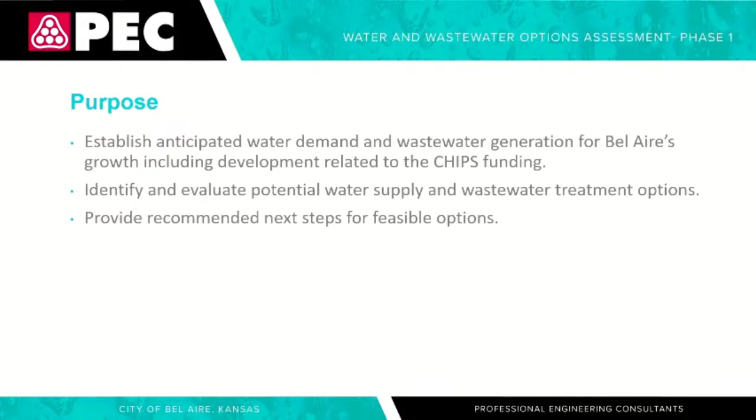So the scope specifically for the options assessment, again we had 4 phases total. This first phase was to take a look at the current contracts you have in place for both water and wastewater service, with CCUA and with Wichita, looking at the terms and conditions for that. We also wanted to look at the feasibility of water supply and wastewater treatment options, also for future connections. Obviously building new treatment plants for everything is an option, but we wanted to see what about future connections to your existing systems. So we looked at that as well.

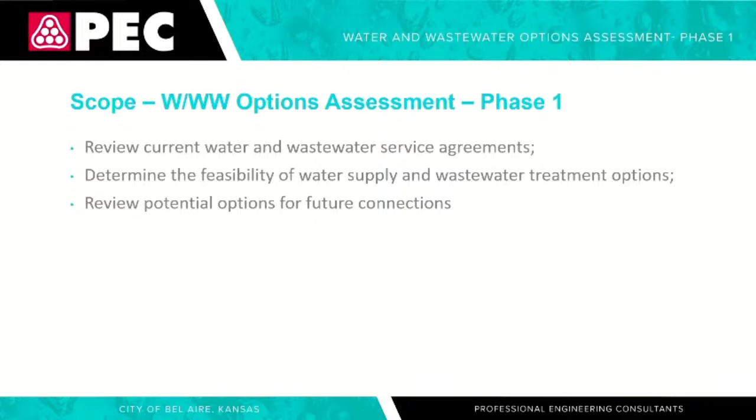Then to provide a reminder of what the water and sewer master plans are all about, since we are marrying up the two of these in this presentation and a lot of the work overlaps: the master plan intent is to really look at what's necessary within the systems themselves. So while the study Nicole's been working on is looking at the water supply side and specifically the treatment side, the master plan is looking inside those water and sewer systems themselves as to what improvements are needed.

The first step in any master planning process is to identify the growth areas and develop water and sewer projections based on, in this case, a 20-year planning period. So looking at what development you anticipate within the community for both water and sewer demands. In this case, we specifically were excluding the Integra suppliers as far as the master plan itself was concerned.

Then what we do is develop actual computerized models for each of those systems. So we modeled the existing water system and the existing sewer system, and then we go through and evaluate those models under current conditions, to identify any current issues or deficiencies in the system that would need to be addressed to fully take care of existing demands. Then we look at those over future periods, typically in 5 or 10 year increments, to see what is necessary to address those future demands as well.

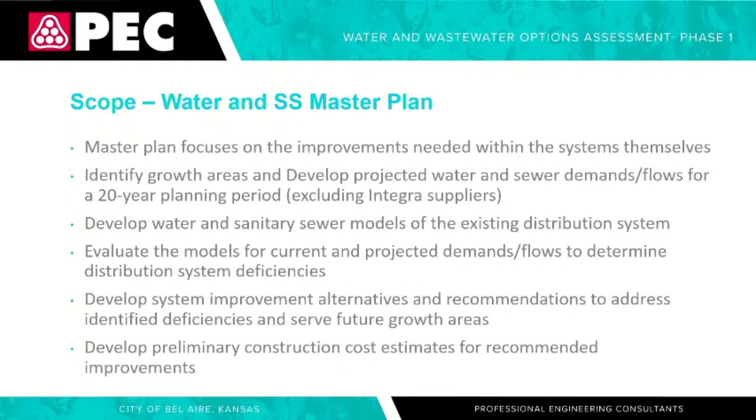And then basically develop construction estimates to go with each of those demands, or each of those projects, that are recommended.

Okay, so this first table summarizes the water demand projections, and there's a lot going on. There are a lot of numbers, there are ranges. So I'm going to go through and explain what all the information is on this table.

So the first thing I want to talk about are the different scenarios there on the left. Scenario 1 is basically what you guys are anticipating for internal development just within Bel Aire in the next couple of years—things that are already on the books for development that's going to occur, and we know those demands are going to be in the system in the next couple of years. So that's Bel Aire only.

Scenario 2 is the development that Bel Aire is anticipating in that next 5-year time frame, that 26 to 31 time frame, plus phase 1 of Integra. And then scenario 3 is, again, the development Bel Aire is anticipating in that 5-year time frame, plus the longer 32 to 43 time frame, plus Integra phase 2. So that's what the scenarios are themselves.

Then we get into the actual demand numbers. So what I want to explain first is the range. Scenario 1 is just Bel Aire—those are the numbers we've come up with in the master plan projections for just what we think Bel Aire is going to need in the next 2 years.

When we get down into scenarios 2 and 3, you'll notice those ranges—the low end and the high end. The high end of the range includes the 5 suppliers. The low end of the range is Bel Aire's demand plus phase 1 of Integra itself. Then if we add the 5 potential suppliers, that gets us to the high end of those ranges.

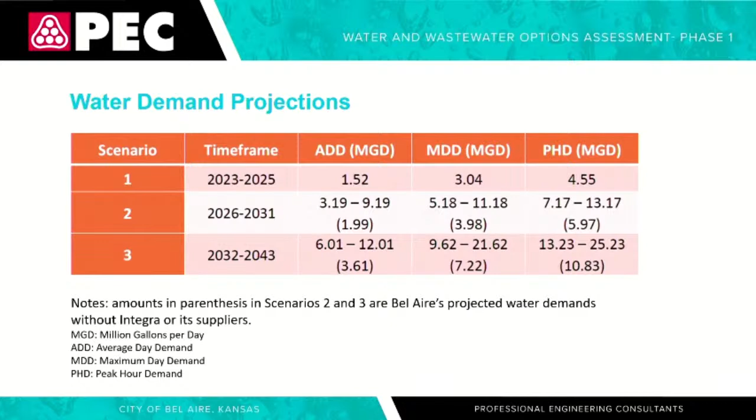So we are talking about quite a bit of water that is going to be needed when we look at these different scenarios for Bel Aire's expansion, but then also Integra and then these potential suppliers.

Okay, so then we're going to look at the wastewater side. All the same information applies here. Basically we're looking at, roughly right now in the next few years for Bel Aire itself, around 1.18 million gallons per day of wastewater flow for just Bel Aire and development. Then if we look at the highest, we're looking at almost 11 if we were to account for Bel Aire, Integra, and all those suppliers in that far out phase.

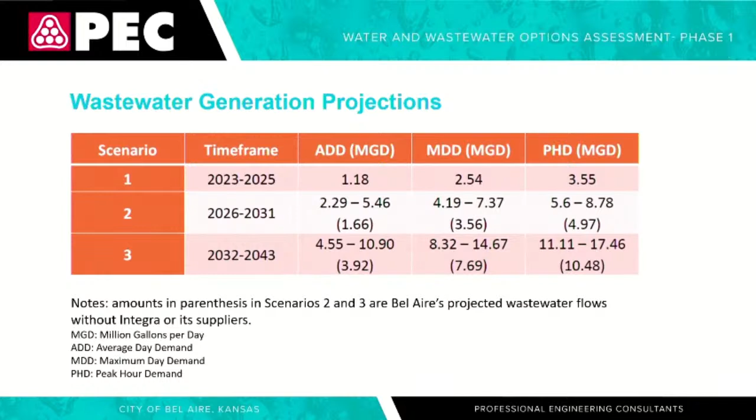So the next thing I want to talk about is just a quick summary of your existing agreements. So the first is the water supply agreements. I'm sure you guys probably know most of this already, but we'll go through it really quickly.

So the existing agreement with CCUA was established in 2002. There's a little over $6 million remaining on the debt obligations on the water treatment plant. You're entitled to 50% of the water treatment plant capacity, which in this case is 1.75 million gallons per day. There is currently no expiration date set in that agreement. And of course, when that agreement was made, the water rights that Bel Aire and Park City had transferred to CCUA. So the city doesn't have any current water rights associated with that.

The agreement that you have with Wichita was established in 2007, and it technically has a 20-year term. So 2027 is the end of that agreement currently. And right now, in that existing schedule, the city was set to receive just a little over 1 million gallons per day in 2028 per the original schedule that was included with that contract.

So basically what we can see from this with the existing agreements is that you could supply scenario 2. A reminder that scenario 2 is Bel Aire's development plus Integra phase 1. No suppliers, but you could do that with the current contracts in place.

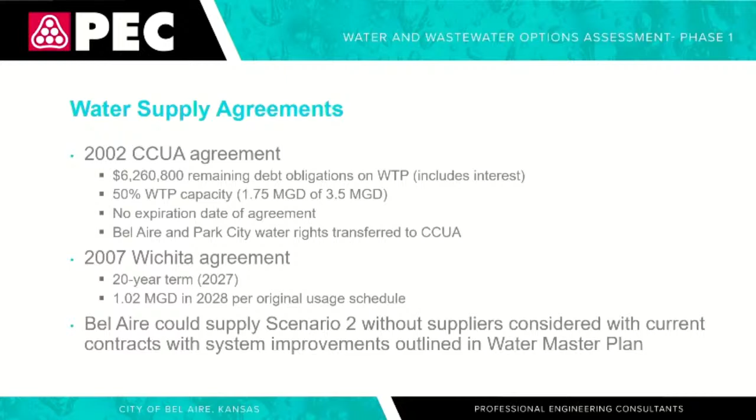All right, so then on the wastewater side, same thing. We've got an agreement with CCUA, same year, a little over $8 million remaining on that debt obligation. Through that contract, you guys have a little bit less than half of the capacity, so 1.01 million gallons per day of that existing capacity. Again, no expiration date on the agreement. And then obviously there's a consent order issue and response that's going on. So that's another issue with the CCUA wastewater plant.

In 2018, the Wichita agreement came online. There's no expiration date on this agreement, and there's no contractual flow limitations necessarily. This is an overflow connection that you have that is not used on a regular basis, but it is a connection that exists with the Wichita system right now. So we estimate, based on the data we had available, a little over 0.42 million gallons per day or so is the average flow sent through that connection, and about 1.25 of peak flow capacity for Bel Aire.

So the summary of the existing service agreements is basically you could just cover scenario 1 with your current contracts, which is just your development in the next couple of years.

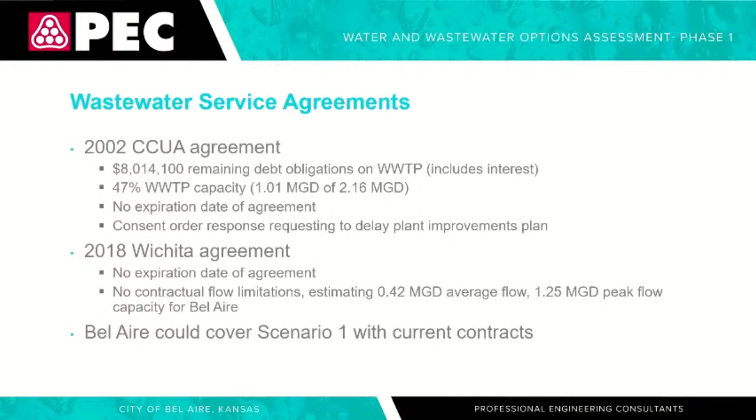Okay, so now we're going to get into the options that we looked at for both water and wastewater. So first we're going to talk about water supply options. One option obviously is the Wichita distribution system. You have connections there already, and there's the potential to supply additional water. A couple things we need to consider, though, are water rights restrictions and a saltwater plume. Obviously, that's always out there.

And when we talk about water right restrictions, that's basically referring to drought conditions. Obviously, if Wichita is not able to get all the water that they need out of their sources, then the wholesale customers will get their water reduced off of that. So that's just when we talk about water right restrictions, it's referring to the drought situations.

So the existing north pressure zone, City of Wichita, which is basically your connection out at 53rd and Rock, between Rock and Webb, could supply a maximum of about 3.2 million gallons per day. We've had conversations with the City of Wichita for them to run their water model to confirm approximately what we think we could get out of each of these situations. So about 3.2 million gallons per day.

And then the existing connection at 37th, like the Woodlawn Railroad area, could supply a maximum of about 2 to 3.5 million gallons per day. Now, of course, Wichita is building a new water treatment facility, and so we looked into that as an option as well. Obviously, the same issues with potential drought conditions would affect that connection as well. But that would require a pump station at the Northwest Water Treatment Facility and a new supply line.

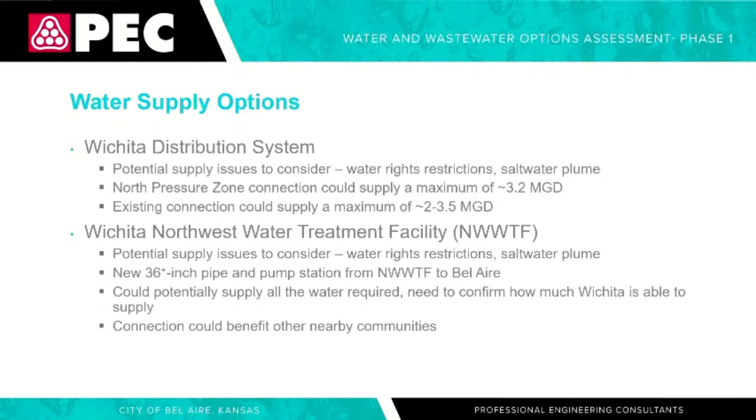We also looked at El Dorado as another option. We talked to them. This option would require, again, a pump station and a pipeline from the El Dorado water treatment plant to Bel Aire. Their facility could supply approximately 3 million gallons per day without any upgrades to their system, but they could get up to 6 million gallons a day as the maximum, though that would require upgrades to their plant. In initial conversations with El Dorado, they said they would pay for the water treatment plant upgrades, but Bel Aire would be responsible to cover the pump station and pipeline costs, and obviously any ongoing maintenance that goes along with those.

We also looked at the CCUA water treatment plant, since you have that as a supply currently. So you can use, as we talked before, 1.7 million gallons per day of the current capacity of that plant.

Two things to consider with that: one, CCUA only has 3.1 million gallons of water rights right now. I know they're in talks to look at recovering some from industrial conversion and some other things that are being worked through now, so there's potential that there are more water rights there. But at the current time, they only have the 3.1 million gallons per day that we can account for, and brand new water rights would be a significant investment for them to look into. So this conversion could potentially give additional supply there.

Just curious, how do you say we have a 3.5 million gallon per day current capacity when the water rights are only 3.1?

The last one on here is beneficial reuse. Anything that of the demands for Integra or their suppliers that could be met with reuse water, meaning treated wastewater that comes off of the wastewater plant, reduces the potable water requirement. So as we move forward and after Integra determines if they're 100% in, we can talk about that in more depth. But that's definitely something we'd want to look at to reduce overall potable water needs, if there's things that can be done with reuse water.

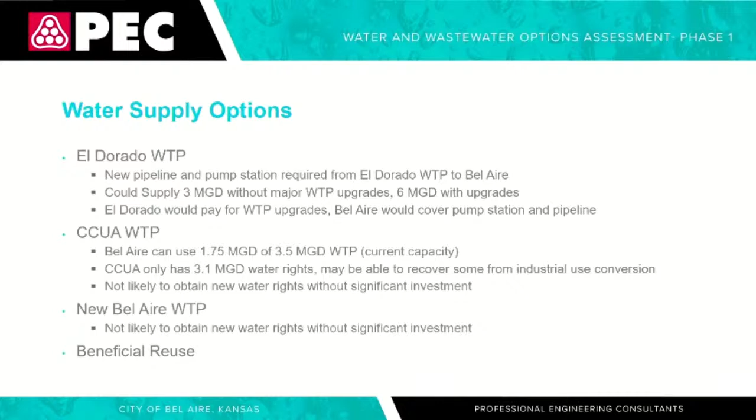So for wastewater treatment options, we looked at a Wichita sewer connection. We looked at the potential for a new connection, which would be at approximately 45th and Rock. That new connection can accept about 1.92 MGD as a peak flow from the city of Bel Aire.

And then we looked at the existing connection, which could accept a peak flow at roughly 37th and Oliver. That existing connection could take about 1.25 million gallons per day. We would need to verify all these flows, especially the one with the existing connection, since we've got data that we're working off of. We'd want to verify all of that to make sure, but based on the data we have, these are the numbers we could work with.

At the CCUA wastewater treatment plant, you've got the consent order issues going on that need to be resolved. But based strictly on capacity, you can use 1.01 MGD of the existing capacity. That plant could be expanded, but based on an estimate from Burns & McDonnell's evaluation, it could only be expanded to about 4.5 million gallons per day because of site restrictions. There's only so much space available to put additional treatment capacity and basins in there, so we estimate about 4.5 million gallons that it could be expanded to. So really, you're going from 2.16 to 4.5. Not a lot of capacity, but you could almost double it.

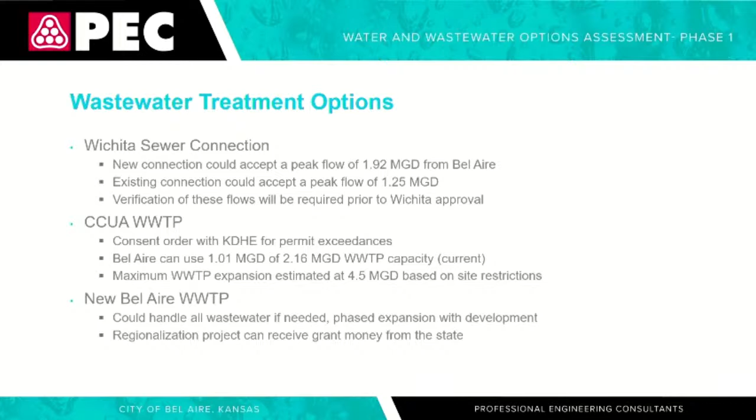Okay, so now we're going to talk about preliminary improvements that have come out of the master plan. As a reminder, this is with Bel Aire and Integra only, no suppliers.

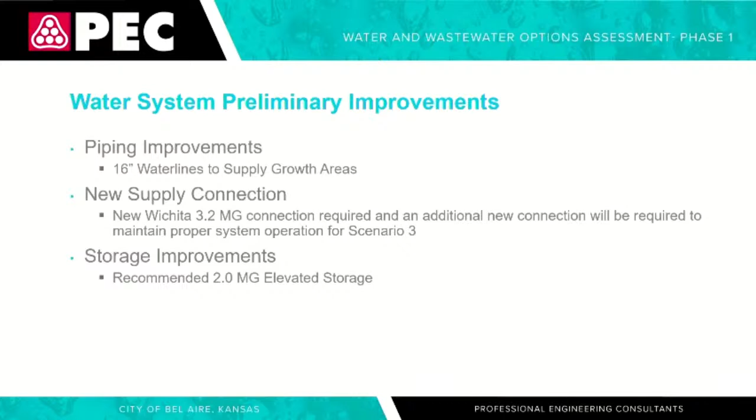And then the other thing we'd look at here is storage improvements, at 2 million gallons. I know it seems kind of strange to put a proposed tank basically right next to the City of Wichita's tank. However, that tank would be required for the City of Wichita - they would have to operate that tank to serve their customers in order to send the 3.2 million gallons a day to you guys. So the City of Bel Aire would need a separate tank of their own to make that system work. Does that make sense?

No? Not really. Okay. Do you want to explain it, Trevor, or do you want? Well, I can explain the 3.2.

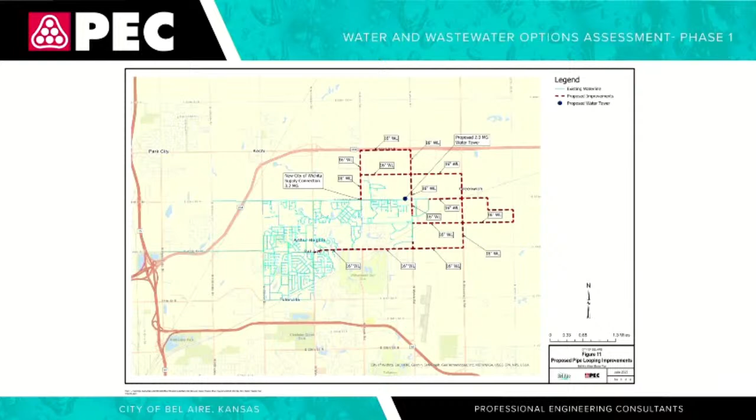The 3.2 million gallon assumption - the goal of the City of Wichita is to get that tank back online. It's been offline and they want to get it back in service for their operation. The 3.2 figure is based on them looking at their model with that tower back in service.

So that was the intent, and that's where the 3.2 came from. They're using that storage to backfeed their system to the south for fire flows and peak demands. There was discussion, even with city staff, about whether we could transfer that to the Bel Aire system. That may still be a possibility, but based on our discussions with Wichita, their intent is to get it in service and utilize it for their own needs.

They have customers near the tower. This is the north end of what they call their northeast zone, and there's a loop of water lines there that feeds south. So this tower would serve to backfeed that entire pressure zone for them, roughly from Webb and 21st kind of to the northeast. Does that make sense? Thank you, Trevor.

Okay, so now on the sanitary sewer - again, these are recommendations coming out of the work we're doing with the master plan.

The first option is CCUA, which would involve new gravity lines and lift stations to take all that flow to CCUA. That would require a new lift station near 53rd and Webb, upgrades at the existing lift station at 53rd and Woodlawn, and an increase of capacity at the CCUA wastewater plant to make it all work. It's a small statement, but there's a lot involved as far as improvements are concerned.

Option 2 would be Bel Aire constructing its own wastewater treatment plant. That would require new gravity lines to take flows from the growth areas to the new plant, while maintaining the existing CCUA and Wichita overflow connections.

The last option we looked at was a new connection to the City of Wichita - a new connection to the 24-inch line to handle the Integra flows. The CCUA and Wichita overflow connections would be maintained, and all additional flow from Bel Aire growth would go to CCUA. So that new connection to the 24-inch line with Wichita would just be for the Integra flows, while all Bel Aire development would go to the CCUA plant.

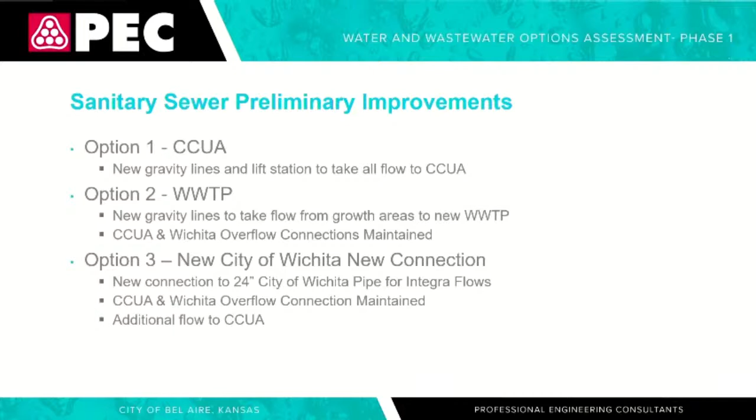Okay. I know these maps are a little small, but is there anything specific you want to point out on these, Trevor, other than where those connections are? Let me see, I think it's on the next one. One more - there we go. You want to point them out or you want me to? Which one? You got to point it back there.

There you go. Okay, so option one was essentially continuing what you guys do today, which is to take everything to CCUA. Obviously, Sarah just talked about the restrictions with CCUA's ability to do that, so this is under the assumption that CCUA could handle all that flow.

In a somewhat simplistic way, we have a new proposed lift station near Integra, and all of the development on the east side would be routed to that lift station. That lift station, in some combination, would be routed through the existing lift station near 53rd, and ultimately through your existing force main going to CCUA. You'll see different improvements around, representing different main pipes that would have to be installed to collect all of these growth areas.

Option two, then, is the new treatment plant.

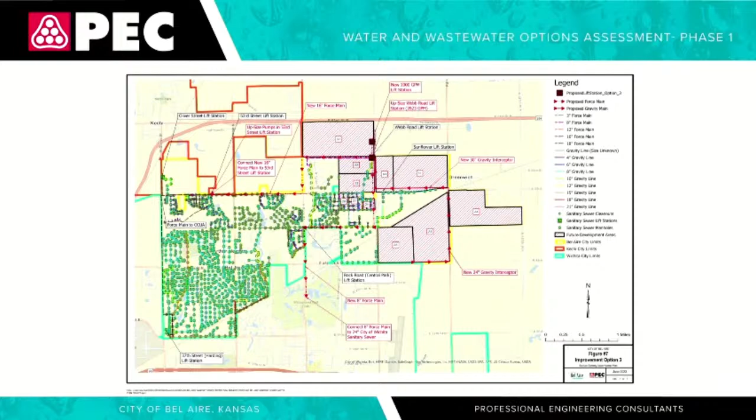Does the line to CCUA have enough capacity to handle any growth at all, or how much growth could it handle? So when we looked at the size of the force main, we looked at it based on allowable velocities that the state allows you to have. So we're maxing it out, which isn't necessarily ideal, but to see what it does.

And it's going to be close. We look at it in two ways: the average flows Sarah's talking about, but also the peak. Based on the numbers we have, if you look at it from average flows, it has no issue. If you look at it from peaks, it's right there—so that will be a little bit of a concern. We're showing that it's borderline in scenario 3.

And what's the assumptions behind that being peak and average—is that just Integra and the existing city, or is it the master suppliers too? It's the existing Bel Aire plus all of your development growth, so all those areas plus Integra. What about Integra's suppliers? No suppliers in that one, just Integra.

And so the reason for the master plan, and Sarah alluded to that—part of it is we need a starting point. If a supplier comes in, it'll greatly change our improvements and recommendations.

So we know what that data point is, what is that average flow in that pipe if you go to that max capacity you just talked about, going to CCUA—what is that? Nicole, do you remember that? Two million gallons a day? No, it's more than that.

So now we want to look at each of the water supply options we talked about and each of the wastewater options we talked about, and see how those match up with construction timelines for the intended development of Integra Phase 1 and Phase 2, and also the actual demand requirements. We note that the existing systems can handle Bel Aire's projected development for the next 2 years, so we're only looking at scenarios 2 and 3 with the Integra development added in.

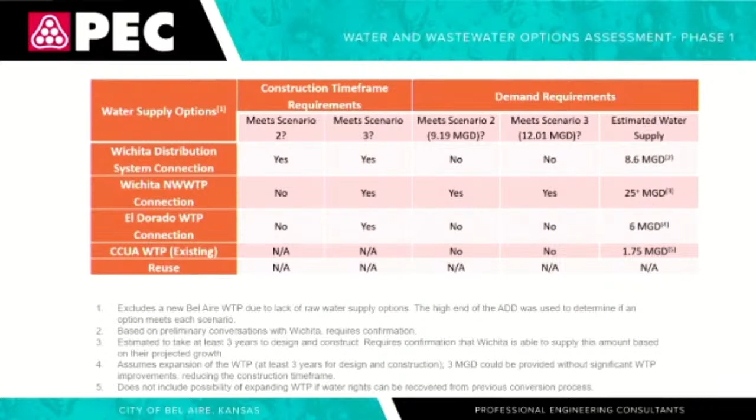These responses, as far as yeses and nos, are based on the high end of those ranges we provided. So these yeses and nos would include Integra and their 5 suppliers. That's a little different than what we were just talking about with the master plan discussion, but these yeses and nos are applied to that high end range.

The first one we talked about on water would be the Wichita distribution system connection. We can meet the construction requirements for when we think Integra and those suppliers would be online, but we can't get the full demand of the 8.6 million gallons per day on that high end of the range with either of those. So we couldn't meet those scenarios on the high end of the range. Remember, these are based on that high end, and as we dial in more about what those suppliers will look like, and even Integra's demand itself, plus what reuse options we have to cut down that demand, these could change. But based on the high end range, we would not be able to meet the demand requirements with the Wichita distribution connection.

The next one is the Northwest Water Plant connection. We couldn't meet scenario 2 from a construction time frame, just because of the amount of time it takes to design all of that, get it in the ground, and get all the easements necessary from the Northwest Water Treatment Plant to Bel Aire. We could, however, meet scenario 3, and we could potentially meet all the demand requirements. Again, that depends on what the city's final answer would be on what they could supply out of that plant.

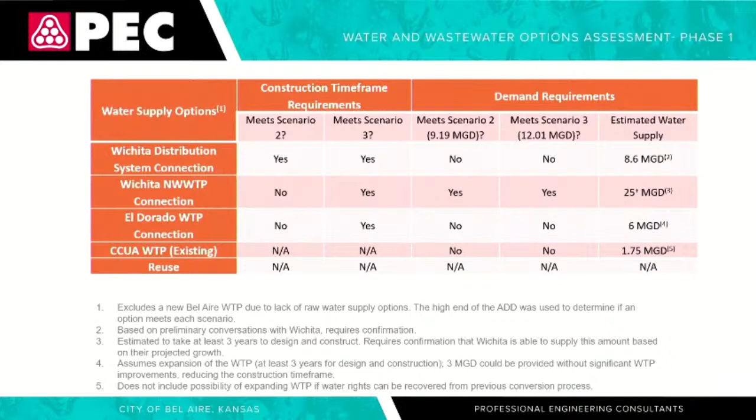The CCUA water plant, obviously there's no construction issues with that because it's already in place. However, we wouldn't be able to meet the demand requirements because of the existing capacity allowed at the water treatment plant. Now, additional water rights may change some of that, but at this point in time, they would not be able to meet that. And then reuse, we don't know anything about yet, so it's on the list, but we can't really quantify that one yet.

On the wastewater side, we'll go through the same exercise. The existing Wichita sewer connection, which is that overflow connection, could help us meet scenario 2 and 3 as far as construction requirements, because it's already there. However, the flow requirements it wouldn't be able to meet, as we discussed, because it's got limitations on the current capacity of those lines.

The new connection we talked about to the existing 24-inch sewer is limited, it's a very short line, so it would not require much on the construction time frame. We would be able to meet those construction time frames, and we could meet scenario 2 demands with that connection, but we would not be able to meet scenario 3.

The CCUA wastewater treatment plant. So what we're assuming here is that treatment plant is expanded to its full potential capacity of 4.5. So just keep that in mind.

Construction time frame would be an issue with scenario 2, obviously not with scenario 3. It's farther out. However, as we just discussed, it wouldn't provide enough capacity because you would have half of that, not the full 4.5. So we would not be able to meet the full demands for either scenario 2 or scenario 3.

And then the last option, with Bel Aire constructing its own wastewater plant, obviously with the time frame required for design and construction, we wouldn't be able to meet scenario 2, but we could meet scenario 3. And that facility would be designed to handle whatever demands we were projecting, so it could meet the flow requirements for either scenario 2 or 3.

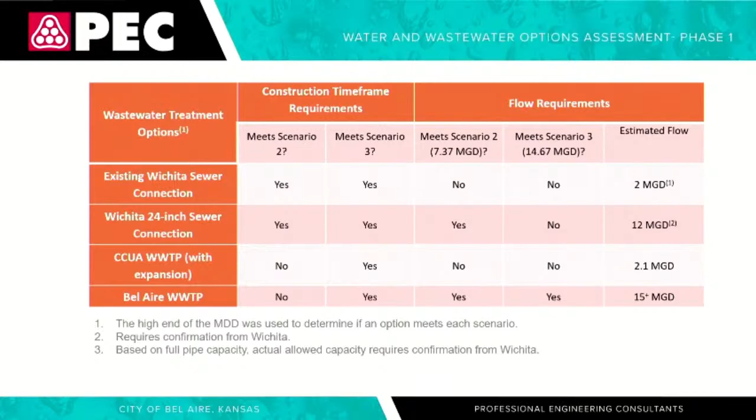Just for clarification, on the sewer, it was the same as the water. This included Integra and all 5 suppliers. Correct. So this is the high end of those tables we looked at with those ranges, based on those high ends. So the hope is we can get more detailed information on those demand requirements for both water and sewer, see what we can do on the reuse side to reduce those water demands, and then refine these down better to see what the really good option is, hopefully rises to the top.

Okay, so now that I've thrown a whole bunch of numbers and stuff at you, we'll talk about what our next step would be. As I mentioned before, we talked about kind of a 4-phased approach to this work. So we'll be wrapping up phase 1 here pretty soon. We're hoping to get some additional information to hone this in a little bit more, but basically we're complete with phase 1, where we're just looking at the options and deciding what really is feasible.

And then phase 2, once we come out of this with the ones we want to move forward with to dive deeper into, we'll move into phase 2. That's where we'll look at those preferred options for water and sewer, and establish the specific infrastructure requirements, what those look like. We will estimate capital construction costs and annual operating costs for those options as well. We'll determine what the permitting requirements are going to be.

Obviously, permitting for a new wastewater plant is very different from a connection to Wichita. So we'll look at what those permitting requirements are, and then we're going to do the rate study as well. I know that's an important part of determining how these options are going to affect your residents and your customers. So once we hone in on those options, we'll be looking at that piece at that point in time.

And then phase 3 would be where we'd be looking at an actual siting study. So assuming we move forward with any new facilities, we'd need to look at a site. Trevor picked out a block on the map, but we'll actually go and determine what a good site would be for that facility. So that's what we'd do in phase 3, and then do a conceptual design for a wastewater treatment plant, if we move forward with one. That's what will be in phase 3.

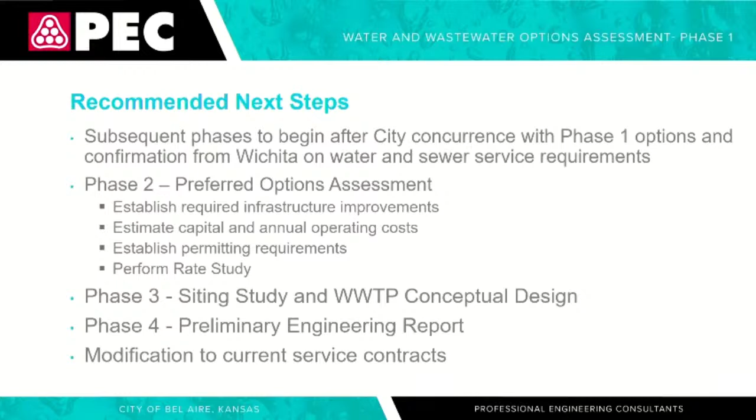And then phase 4 was where we would put together the actual preliminary engineering report that's required for KDHE, and then the funding mechanisms you'll be looking at. And then, of course, the last step in this process, once a determination is made as to how we want to move forward, would be making any necessary modifications to existing contracts to be in line with what options we're going forward with.

And that's all I have. So what other questions do you have? You guys have been really engaged in asking great questions. So what else is on your mind?

On the reuse side, have you looked at other sources other than Integra for reuse, like Catholic Care Campus? I don't know, there might be others. I just don't know. Yeah, we have not specifically looked into that. But if we look at a reuse option, we would certainly want to look at whether there are other places it could be reused. I know right now it's the golf course.

Obviously, they take the water and use it for irrigation. That's always an option. Most likely it's going to be either other irrigation sources or potentially, like Integra, some sort of industrial process where they would take that wastewater and treat it however needed to use it in their existing processes, like cooling towers and such. So most of the time it's going to be some sort of irrigation or industrial type use or supply.

We have not dug into that specifically with others. We just know that as we move forward, we want to definitely look into that option, specifically with Integra, because of how high their demand is, them and their suppliers as well. So we want to make sure that's part of what we're looking at.

I just know that, like I mentioned, the Catholic campus there, I don't know how many acres it is, probably 160 or more acres, and it's irrigated. So that is certainly an option. I know it's a golf course, but in Dodge City several years ago we did a project where they now take reuse water instead of using a well to fill their pond for the exact same reason. So yeah, those irrigation options are certainly available. It comes with some restrictions, like when you can water and you can't spray people, blah blah. But it's certainly a thing that can be used in other locations.

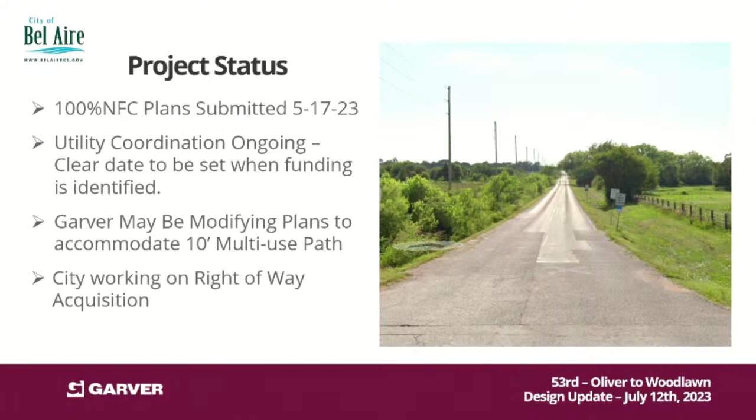Project cost, when we did our estimate, we updated our cost. Our construction cost right now is about 1.8 million. With all the other costs that go into the project, total ends up closer to 2.5 million when you add in everything else. That does not include the sidewalk changes.

The sidewalk changes will add about $300,000. That'll eat up most of those costs. We'll have to extend some pipes further to accommodate the sidewalk, plus there's the additional cost of sidewalk itself. There's 40% more sidewalk than there was before, and some other changes.

Plus, one of the requirements on this is we were just going to basically connect Oliver to Woodlawn, but we'll have to extend it further. So these costs are prior to that, but we're looking at around $2.5 million for the project.

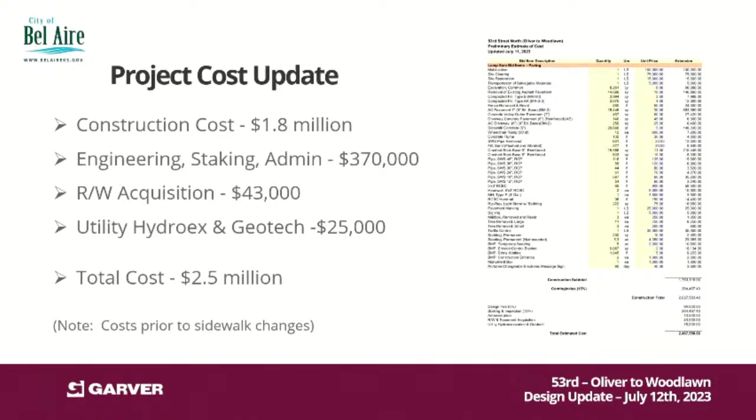So it'll be a 12-foot driving lane and a 3-foot shoulder. We didn't really have enough room to go bigger than that, but what that'll do is if somebody has an issue where they need to pull over, they'll have that extra 3 feet, 4 feet more than they have today. So it'll be a safer environment for people passing.

With the total width of the road being 30 feet of pavement now, with the proposed section you can get 3 cars through there if you needed to, where right now it's a stopping situation. There'll be enough room for cars to safely make their way by.

We are shifting the center line of the road 4 feet south from the section line. The main reason we're doing that is to minimize work in the north ditch. There's a lot of right-of-way limitations on the north side, and we wanted to limit the number of negotiations the city had to get into on right-of-way, since it would have been a significantly higher amount needed if we didn't offset it to the south. So we're essentially matching the south ditch for most of the project section.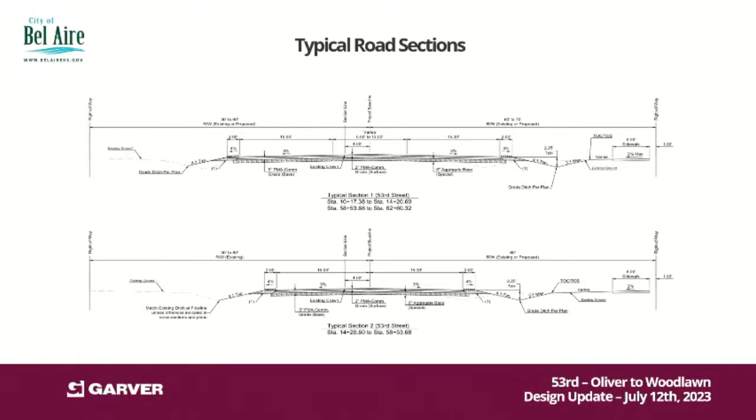Ken, quick question. Are you comfortable that that is the right solution for a future road? Or are we going to be 10 years down the road when we need a 3-lane moving north anyway? Are you comfortable that shifting south is the right thing in the short term and in the near term?

If you go to a 3-lane curb and gutter section, you'll be fine. You can't go to a 3-lane ditch section with the room we have available, but you could do a curb and gutter section with the room available. There's plenty of right of way on the south side. And the right of way take that I'll be talking about in a little bit, that'll take you to 60 foot the full length of the project on the south side.

So you can do it quite a bit in that. And you've got 30 feet minimum on the north, so you have 90 foot of width. That'll be plenty for a 3-lane section if it's curb and gutter.

So this current proposal here is just a 2-lane road. That's correct. We'll have turn lanes at the intersections at each end of the project, at Oliver and Woodlawn, but in the middle part of the section, we aren't going to have any turn lanes.

So none of the developments will have those turn lanes? We talked to them and they were willing to let the city do it for them, but when we said you'd have to pay if you wanted to do that, their enthusiasm level died. So there was a lack of enthusiasm if it was going to cost them money to do the improvement. So no, there won't be any turn lanes in the middle of it.

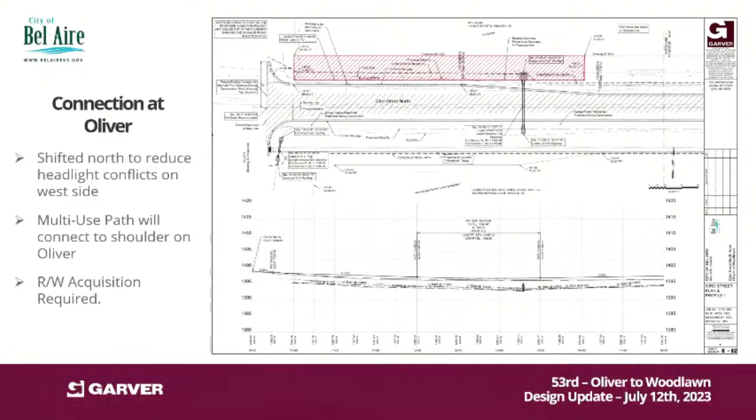So I'm going to just walk through the project a little bit and talk about some critical areas we looked at, just so you understand. The red up here is the right-of-way take in order to widen the road. We did shift the road north because one of the big complaints that's been ongoing at 53rd and Woodlawn is when you pull up to the intersection, you get headlights in your eyes from the other side.

To the north or south? We're shifting this one to the north so that your westbound traffic will not be staring into the eyes of future left-turn or straight-through traffic. So we're shifting everything north there to eliminate the headlights in the eyes for people going westbound.

So when you're here, you'll be shifted a little bit north of the center line of this roadway. If we centered it, you'd end up splitting the difference a bit with the traffic on the other side.

They're going to be lined up close enough. There's not going to be any problems for people going across. It'll be no different, similar to what you've got going on at 45th, or at 53rd and Woodlawn, where there's a little transition but it's not significant. This will be similar to that, and that's also a wider roadway over there, with wider shoulders and that type of thing. So we're not expecting any problems with that.

Which intersection is this? This is Oliver. Okay, yeah, so this is Oliver. That's where I was mixed up.

So this shows a proposed 6-foot sidewalk that's going to change to 10-foot. This one is going to just tie into the edge of the shoulder at Oliver, and folks who want to go up Oliver will have to go up the shoulder. At some point we'd like to see a bike path or multi-use path going up the east side of Oliver, but that's a project for a different time. This will provide connectivity through there, and they'll be able to go from the pavement here, turn the corner, and come in.

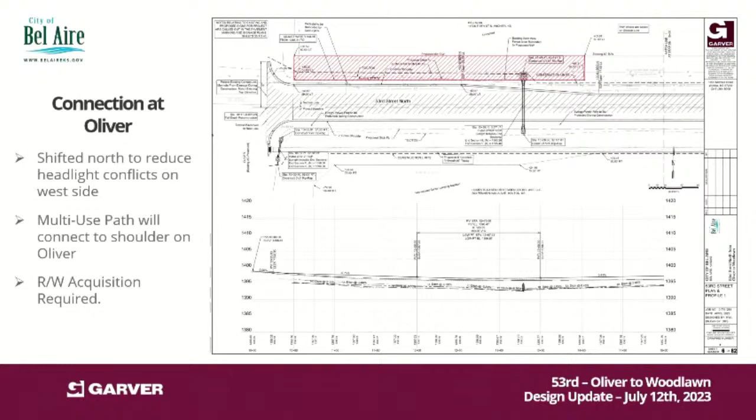This is another part of the project that's got a lot going on. This is the Kilgore property, about a quarter mile east. There's a significant right-of-way take here, the only one on the south side of the road.

You can see we have a box culvert here. There's a large drainage channel that runs out of the additions south of here and up through this area, so we're putting in an improved box with better capacity. Because of the box, we swung the sidewalk up closer to the edge of the road to reduce the cost, since that box can easily cost $1,200 to $1,500 a lineal foot. So you save money real fast doing that.

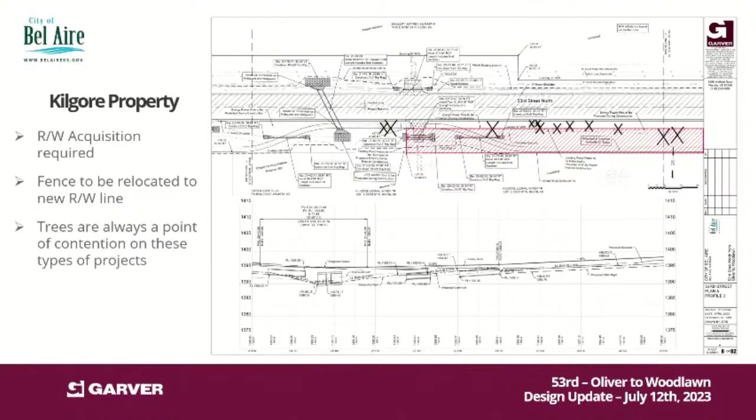There's an existing fence out here that's in the future right-of-way, and part of the right-of-way agreement will be working with the property owner to get that fence relocated to the new right-of-way line. You see all the black X's here—whenever you're doing a right-of-way take on these kinds of projects, it's always contentious when you're working with a landowner and taking away their trees. These trees were planted by the landowner years ago, and many of them are on their property.

Looking here, this is a couple of the subdivision connections east of the Kilgore property. I think this is Central Park, 6th Addition, and this is Central Park 3rd. These are a couple of the roadways, and any existing driveways that have been built will have to be removed because they won't work with our new section. We'll tear those back and install new drainage flumes.

One general rule we're going to follow is that specifically on public road crossings, we're going to provide detectable warnings on the sidewalk to make sure we don't have any ADAAG concerns. So we'll be putting in detectable warnings on those.

The detectable warning is what you see at a wheelchair ramp—a 12 to 18 inch wide panel of little bumpy bricks. Those bumpy bricks are the detectable warnings. I'm not sure we'll have many people with vision issues out here, but just to be sure, we want to comply with any ADAAG requirements. So where we're crossing some public roads, we'll definitely have those.

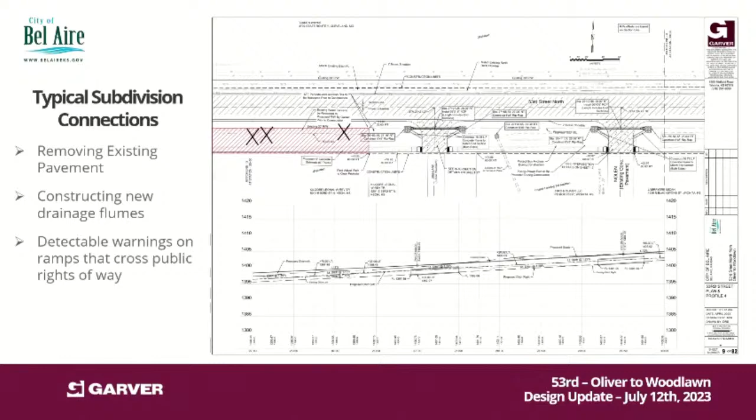Another area of concern I wanted to talk about is just to the west, the Bristol Hall Addition. There's a box culvert that's going to drain their pond out, and the lift station is right here. If you've ever looked at that lift station, it's not a very safe situation for city staff right now—it's a very narrow driveway, very steep, and difficult to park and maneuver out of.

So we talked with Ann, and we're going to more than double the width of the driveway there. If you have two employees, they can both park off the roadway instead of one car sitting out in the road. We're also going to provide a turnaround area, so a single vehicle has the ability to turn around without turning on the pavement—just trying to provide a safer environment there.

Again, because of the box culvert and everything here, we ended up extending this pipe longer to get past the sidewalk, and then brought the sidewalk up to the edge of the road to reduce the cost of the pipes crossing the roadway.

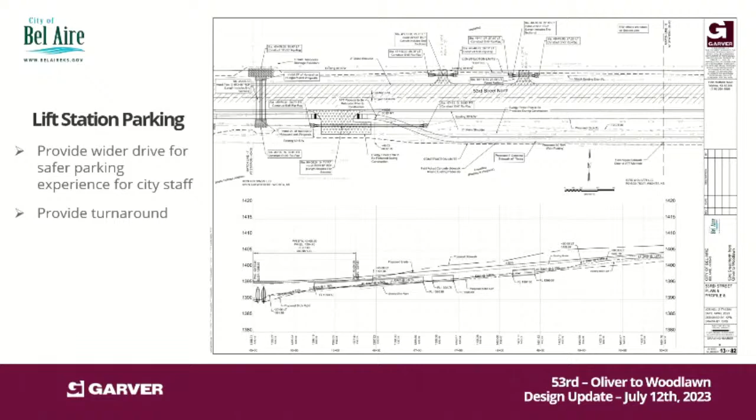At Woodlawn, we're more centered, but the goal was to match the lanes across the street with this configuration. With the road widening up to the north, eastbound traffic won't be as conflicted with headlights in the eyes.

The other thing we did here, not easy to see, but if you look at the plan sheet and your plan set, we're actually raising the road almost 2 feet as it approaches the roadway there. So you don't have cars coming up with their headlights angled up in your face as they're approaching and stopping—we're raising that up so they're leveling out.

By the time they get up here, they're leveling out more level with the pavement, because that's one of the big problems with that intersection—just the angle of approach. It puts the headlights up in your eyes.

Here's the sidewalk connection here, again to the shoulder. The plan on this one, with the other funding, is to widen this road out. We'll probably need to cut through this corner here, and extend this storm sewer pipe to get it crossed over to the other side where Isley's sidewalk is at. Of course, there's a large communications box right at the end of the sidewalk where we'd like to connect. So to avoid an expensive utility relocation, we're going to plan on just moving everything about 10 feet south to stay south of that utility connection. That'll actually line up—there's riprap and stuff on the east side of the road that will help us stay out of that a little more, out of the drainage ditch, minimizing our impact there.

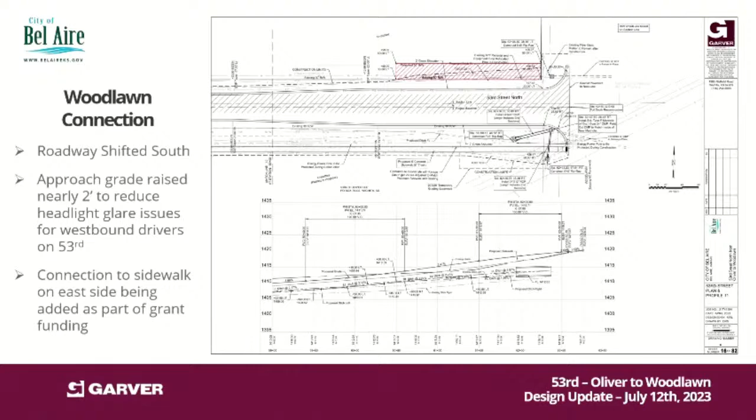Ken, will the plan be to have some sort of a walk? I know there's no plan to do an intersection or light—is there any plan to put a push button there for crossing? In the short term, our plan is to just put some crosswalk signs and stripe it. You could look at doing an RRFB or something like that. I would say not—you wouldn't want to get into the expense of a full-blown signal there, but you could look at an RRFB or something similar.

If you don't know what an RRFB is: if you ever go out to the airport and drive around the loop by the DoubleTree, there's a couple posts, one on each side of the road, and if you press the buttons, the yellow lights flash rapidly. That's an RRFB—it's just a way to draw people's attention that something's going on.

I know there's something similar going on right now with 45th. Is there an opportunity to partner with the school district to pay for that light so they can use that sidewalk as safe walking? We haven't had that conversation yet, but I'm talking to Shane Schumacher on a couple different things already—he's their property management person who deals with sidewalks. I can certainly ask them about that.

We'll talk about it on the 45th presentation. Then we have another project in Southeast Wichita where we're looking at a crossing, so we can talk to them about that.

So here's just a typical marking plan—you can see the proposed striping there on the roadway. Again, 12-foot lanes with 3-foot paved shoulders. There's no passing zones right now; a couple areas have limited sight distance where it's no passing, and we aren't changing the grade significantly enough to change those, so the no passing zones will remain substantially as they are today. We'll plan on signs that aren't reused or reset being salvaged back to the city of Bel Aire to determine if there's any use for them elsewhere.

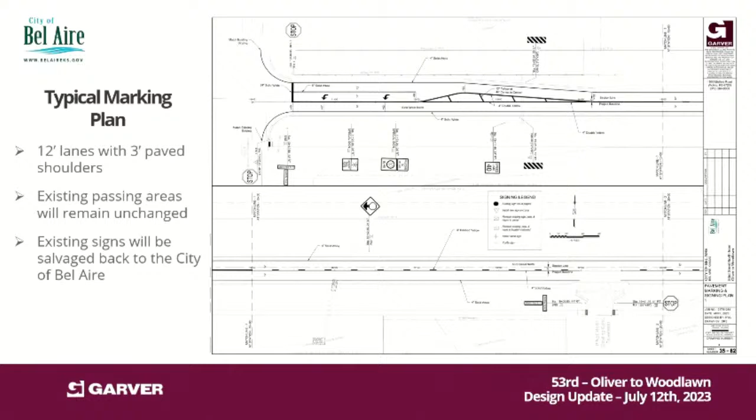So, construction phasing plan—I'll mention here that we're still working with our construction services staff on some lessons learned from the Woodlawn project as far as phasing goes. We'll have them walk through the plans again before we go to final to talk about this. One thing we're considering right now is potentially doing a full shutdown on the eastern third of the project. That gives the contractor a lot more freedom to really go quickly. There's no driveways, no access points in here, so people could just go in and out and go to the west.

The only thing to consider there is how do we handle turnarounds. We may need some kind of temporary hammerhead configuration. The concern is you don't want to have somebody stuck where they can't safely turn their vehicle around. That's really the only concern.

The alternative, like what we have with phase 2, is that during phase 2 construction we would just have eastbound traffic going to the school. The idea is carrying that traffic into school, so people going in the morning could get there.

Phase 3 depends on when the project goes to construction. We're showing westbound on phase 3, which would be the south half improvements. If it's not during the school year, it may make more sense to do that, but if it is during the school year, we may still go with eastbound. It just depends on the timing of the project and what makes best sense for the stakeholders who use the road.

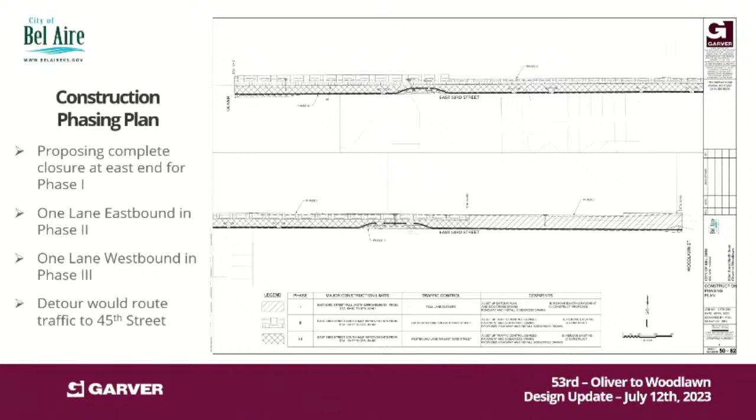Some of it depends on the time of year. Like we've been running into the last couple weeks, it rains just often enough to keep the ground conditions wet, so it depends on ground conditions at the time. Ideally, if it's bid out in time to start construction in spring, it would be one construction season, not a two-season project. This project should not stretch into a second season, barring major weather concerns or similar issues.

There were some significant water issues at some of those developments along there. Are you anticipating any water issues for this road as well? We are upsizing some of the pipe systems where it's crossing the road to help carry the water more effectively across there, so we will try to alleviate some of that.

As far as water issues, if you're talking about the projects that had groundwater issues, when we did soil bores on it there wasn't any groundwater reported as an issue in the roadway. When GSI did soil bores a couple years ago, there were no groundwater issues in the road. The groundwater issues are really concentrated about 150 to 200 feet south of 53rd.

There's just kind of a band of water that runs through that property. We're doing construction observation on Bristol Hollows right now, and the groundwater is actually significantly lower than it was a few years ago. Back then, if you kicked the dirt you'd see water. We dug a 3-foot hole next to the roadway to check soil conditions, and it was dry 3 feet down. The road itself, 53rd, is significantly higher than the area that was having groundwater issues in Bristol Hollows in particular. So long story short, I'm not expecting any groundwater issues.

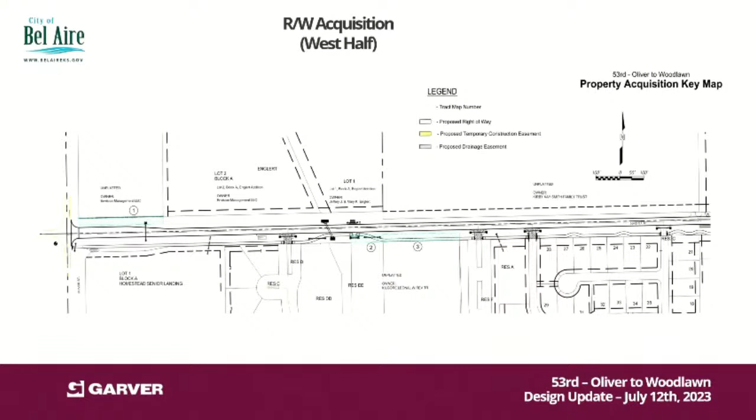On the east half, this drawing here actually shows the wider sidewalk that we're proposing. One of the issues we're running into is there's a bunch of power poles that are just the right distance from the right of way that we can't slide in behind them, so we're going to have to go out in front of them. And so I've given this to Ann.

We will probably end up straightening this out. We probably won't do that many little serpentine curves in a row. We'll probably straighten that out a little bit, and we may lengthen these out a little bit, but we wanted to give her an idea of the utility concerns out there.

But on this one here, we do have a couple drainage easements where crossroad pipes cross, so we need to get easements. Then here at the east end, there's a right-of-way acquisition to accommodate the widening of the road. The reason this only goes to here is as this road is rising up, the ditch is getting deeper, so that's why we needed it on that north side. There is just the road, because we're raising that grade up. We needed a little bit extra right of way in that area to accommodate the deeper ditch we're creating.

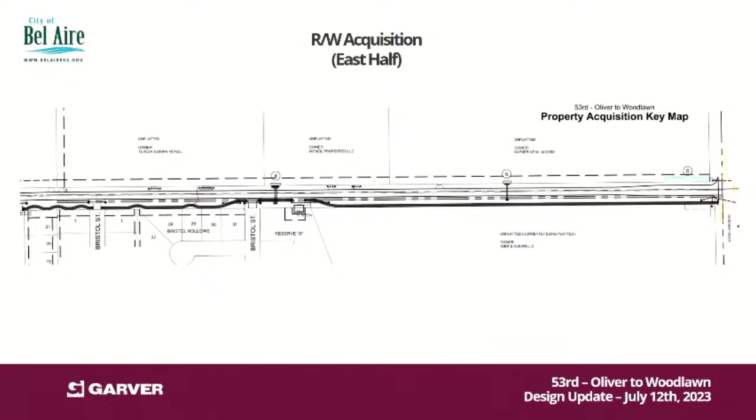Utility coordination, I just want to touch on that. We've been working with Lumen. They have a plan complete, they're ready to start relocation. All they got to do is 2 things: they need to turn in a permit, which I talked with Ann about, and she gave the contact information for that. But also, some of the relocation is going into the new right-of-way, so they need the new right-of-way to be acquired before they can do the relocation.

AT&T has a pedestal at Woodlawn that's right in the middle of our future ditch. It's going to be a significant cut, and they're asking us to provide a 3-month lead for them on getting that relocated, maybe 4 months. Tell them to start now.

Well, and I know one of the things I needed to give them was an anticipated bid date that we're going to set, that'll help. They didn't want to start spending money, and you know how things go—a lot of plans are made and then never end up happening, so they didn't want to expend the money until they know for sure it's going on.

Cox, so far the only thing they've identified is they have one resident who has a fiber optic service, and just because we all love to pick on Cox—that was funny—we sent a guy to hydro excavate it. We were doing some hydrex on some gas pipelines. It was 3 inches deep, so it was a pretty quick hydrex on that part.

And then again, the power poles you saw on that previous slide, we are trying to leave the power poles in place so we don't get into a bunch of expense moving power poles and that type of thing. So we are trying to do that. And then as far as other relocations, we haven't been made aware of any.

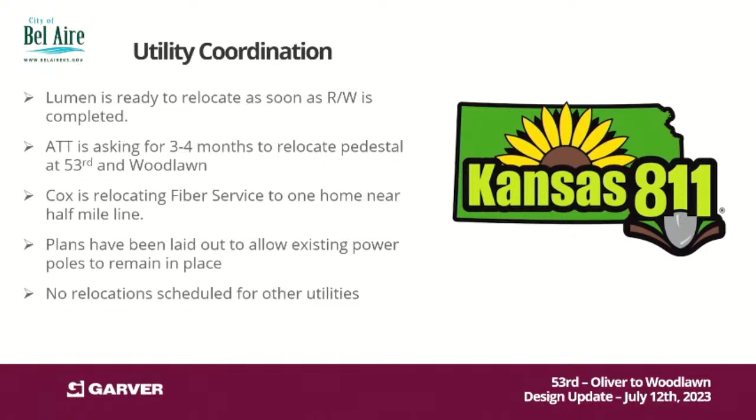We talked about this a little bit, but the grant funding is coming up, and this is a picture of that area I was talking about. There's that box I was talking about that's right off the end of the sidewalk. What we're going to plan on doing is coming in through the middle here, across the end of this riprap, and bringing it across and tying it into the roadway. We will tie that in, and as I mentioned before, there'll be some impacts on storm sewer and that type of thing.

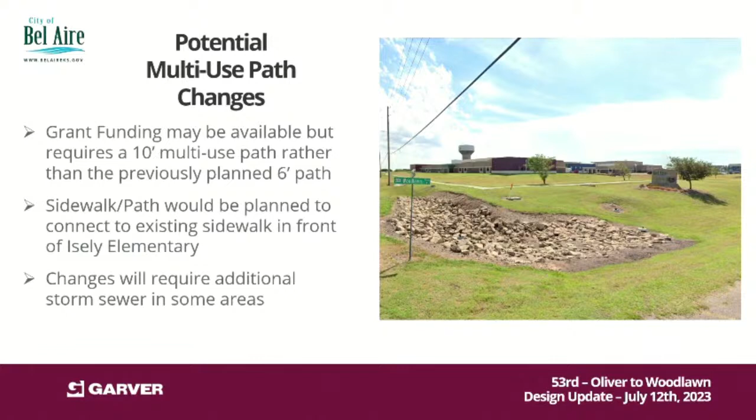So anyway, with that, I'll take any other questions you might have on the project right now.

So in that picture, will the path be elevated, so that when it rains, you're not walking and driving through it? Yeah, the path will be—we will size a pipe that's big enough to carry the water through there without impounding it. But I imagine we'll probably try to drop it a foot or two in between just to minimize the fill, but it'll be, I would guess, somewhere around 3 feet above the flow line. They'll be above the flow line with the path. We won't be trying to go through the channel itself.

Well, Ken, my first question would be, knowing what you know and what you have left to do, when would you suggest that we plan to bid the project if it were in a perfect world?

In talking with the utilities, right now I would say we'd probably be looking at - AT&T said they'd like 3 months, so that would be probably sometime in October, maybe early November, but sometime in that time frame is what they would prefer to see. As far as our plan changes for the sidewalk, we're anticipating we can have those done in just a few weeks. We've already started the preliminary looking at it, but we're a few weeks out, though that won't be a delay as far as that goes. I would say, and Ann, I don't know if that's kind of what you're thinking, but probably at this point it'd be sometime in October.

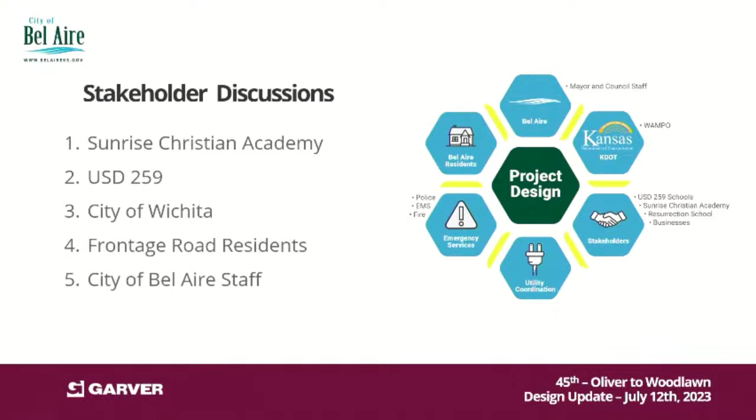This is a slide I reused from the last discussion where we have our different stakeholders that we've been talking to - some of the residents, Sunrise, USD 259, City of Wichita, and the Bel Aire staff. I'm just going to kind of walk through the project.

We've presented this concept to Ann and Ty, they've given us some feedback as far as their concerns, and we've included those. But there's some stuff I want to talk through as far as what we're doing, and then at the end there'll be some questions as far as getting some feedback from you on what you would like to see us do on the project.

I intentionally did not show the intersection at Oliver, it's not part of the discussion today, so I didn't want to put any extra emphasis on that. That'll be a battle for another day once we get the traffic counts done. So I'll ease your minds - you don't need to worry about any discussions on that tonight, or any decisions, I should say.

No binding ones. So, looking at the west end of the project where we're connecting to Oliver - I mentioned it last time - we are proposing a frontage road here. What that does is eliminate these 3 driveways that connect onto this roadway, and potentially more driveways in the future closer to the intersection. From an access management perspective, you typically don't want to have driveways within the City of Wichita within 400 feet, but that's what they like. By lining it up across from Glendale, it would provide a safer environment for these users in the future.

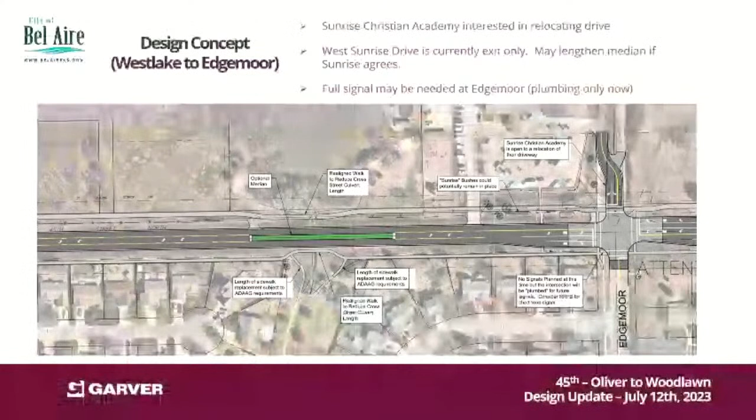Going east from there, we have some empty parcels that are future development possibilities. We were told when we met with Sunrise that this can be used as a staging area during construction of the project, since they don't have any immediate plans for the property. This empty parcel they've already offered up as a staging area for construction.

We did this median because of these properties. This median is limited in length. The design I did uses a 50-foot radius off the end of this property line to give enough room for a vehicle. If they have a trailer, they can pull out around the end of that.

We're realigning the walk a little bit closer to this roadway here, again to minimize the pipe lengths of the crossroad pipes in that area.

These two sidewalks that connect down to Eagle Lake, we'll be looking at reviewing the grades for ADA compliance, so those may get a little bit longer before we're done, just to make it more comfortable. I was riding that the other day on my bike and had to go down many gears to feel comfortable going up the hill. So I'm looking forward to making that a little bit flatter.

It's all about you, Ken. Just letting you know, everybody else's toddler is going to be disappointed. He loves running down the hill.

We'll put in a steeper part there. We'll put a side path that's steeper.

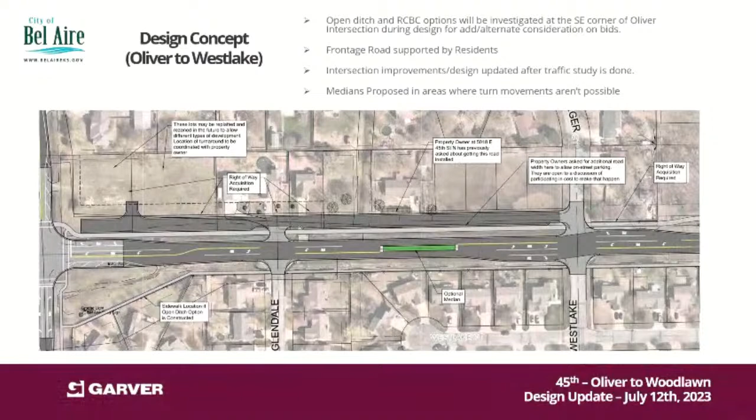We haven't done our traffic counts yet, so that'll be one thing we double check, making sure that this one is warranted when we do our traffic counts. We're going to start our design under the assumption that it's necessary, but we will double check that.

Going on to this next piece, this median here, the one thing that's kind of odd is this exit for Sunrise is currently outbound only, the way their parking lot is striped and the way they operate. So in theory we don't need this turn bay here, we could lengthen this median out. The one thing we need to talk to them about is whether they want to maintain that ability to flip their traffic around, so we don't get asked to tear that median out at a later point. Right now we're leaning towards leaving it short just in case, because we don't want a situation where we have a brand new median and they say, hey, we're redoing our campus, can you tear out the brand new median? So that's where we're opting on that one.

When we met with Sunrise, they were adamant that the driveway needed to be moved to the intersection. I talked with our traffic guy working on the traffic study, and he agreed with that. What that leads to though is the volume of traffic here. Edgemoor is down the road, and this is probably going to be an intersection that will likely reach warrants at some point if you wanted to signalize it. We wouldn't want to, I wouldn't recommend spending the money right now, and I don't think it would even meet signal warrants during our design period. But our plan right now is to lay it out to work and just plumb it, so if you ever do want to signalize it, all you have to do is drop in a controller, pop up some poles, and go. So that's what we're recommending.

Sunrise has agreed, they like the idea of realigning the driveway directly across from Edgemoor. So that's one thing we're planning on. We talked to them about relocating the crosswalk down here, because outside of the school this would be a better spot since it goes directly into the park. But they said they already have problems with kids jaywalking, and right now it's only 75 feet away and they jaywalk. If you move it further west, you're just increasing the number of jaywalkers. So I think we're stuck with a situation where it makes the most sense there. The only question is what kind of signal treatment we do, and does the median have an impact on the jaywalking, the way you would do a median.

Give them a place to stop at the middle of the road. People are just lazy, they're going to take the shortest route. I don't think it'd be a tall median, more like a curb, or just put a wall. Well, they sometimes have the bigger concrete medians. You're talking small like a Jersey barrier type concrete thing? I don't know what you'd do there. I haven't talked to Ann about any enhanced median treatment there, but my guess is they're going to jaywalk regardless, even if we don't put it there. That's been the discussion.

We talked with Mike Spade, our traffic guy, and he agreed that's just human nature, people are going to do that. But we need to look at what kind of signal treatment makes the most sense in the short term if we're going to move it there. That's still some work, and we need traffic counts to really evaluate that more.

So the question of the Sunrise entrance is great, and I like the idea of doing a full intersection. I think it's better for the community, it's better for Sunrise. Is there going to be any cost sharing on that? That's clearly not just a driveway, that's a road built into their property. How does that work? How would cost share work on that with a private school?

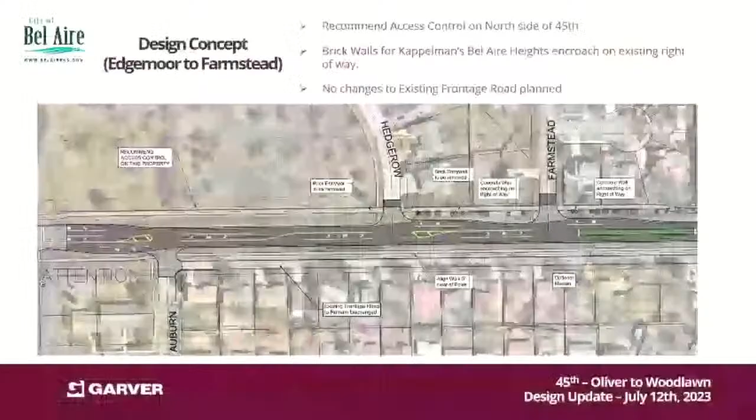I thought there was a median over there. Yeah, there is enough room. We do have the frontage road down here. So if we start moving it south, we're going to start squeezing closer to that frontage road. But that is something we could talk about doing, as far as putting in a little bit of a reverse curve and realigning the road there a little south. That's something we could look at doing.

But you'll still have the same issue. There's a current sidewalk there too, I hope we would save. You're still gonna have the same issue with elevation change on that side, wouldn't you?

Yeah, and actually that sidewalk is smaller than the standard now, so we're actually proposing to replace that walk right now. But we were going to move it kind of out in the middle, and you can see there's a little bit of room even with where we have it aligned. But yeah, to your point, Jim, we could shift that road to the south a little bit as a part of the discussion.

But it is one of those things. It is an encroachment on the city's right of way. That's something we'll have to decide on, how we want to handle that.

Is there an HOA in that area? Yes. Your area, your neighborhood. So, like I said, our survey is showing that. I double checked it with the county's GIS. I'm confident that wall is a problem in terms of it being an encroachment. That we'll just have to decide how we want to go ahead with that.

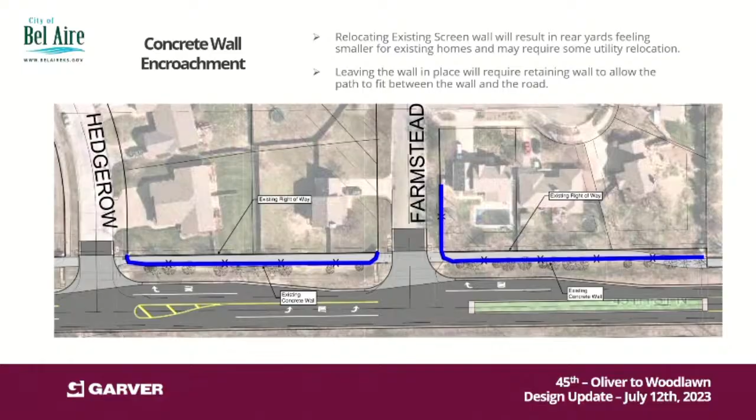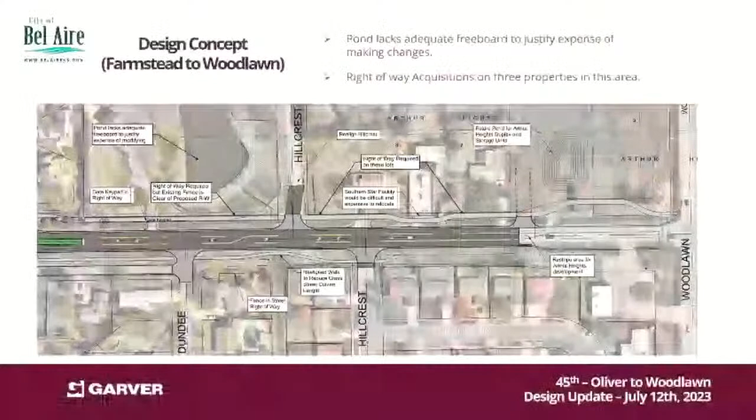The lane configuration that MKEC used on this is slightly different than the lane configuration here, and there may need to be some retransitioning of the striping when we get it tied in, because we're actually going to remove and replace a little bit of the curb here with the way they narrowed it up. When they did their design, in the areas where they had the 3-lane, they did 11, 12, 11 foot lanes, I believe, and in the area where they were going to 2-lane, they did 12-foot lanes. So it just creates an awkward situation - it's not designed the same when they laid that out. It's only off by like a foot or so, but we may have to redo the striping anyway in the future, no matter what.

Yeah, so there'll be a little bit of transition there that's going to have to be done.

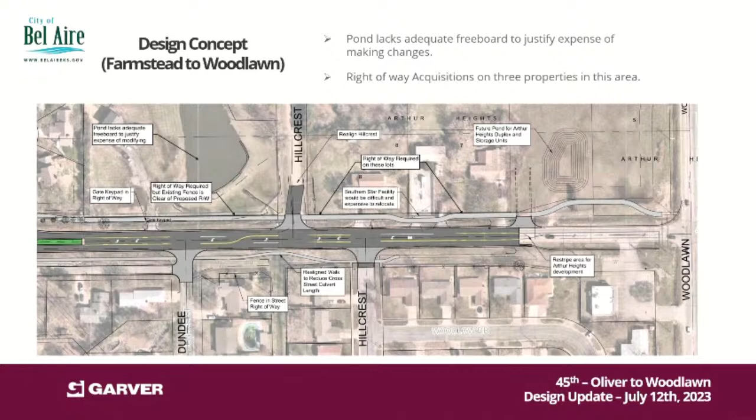One thing I wanted to wrap back to a former conversation - USD 259 is interested in doing this crosswalk. It's not totally tied into 45th, but it does impact the sidewalk up there potentially. We provided cost estimates to USD 259 for the RRFB and sidewalk, around $100,000. They haven't got back to me on whether that's something they're interested in doing. They said they'd take it under advisement. So one thing you may want to decide for yourselves, for citizens wanting to cross this road, is does it make sense for the city to approach the school district and say we might be willing to pay a portion of that cost? I don't know that you want to or need to - I know money's a finite resource, but I wanted to mention I haven't heard anything back.

Just a few things to think about today. Again, no binding actions taken today, but that frontage road at the west end - for the city to participate in working with them, even if we make the property owners pay for the paving and the additional right of way it's going to take, plus a little additional dirt work - it's probably going to cost around $75,000 for the city. It's probably a $300,000 frontage road, so it's still a significant investment by the property owners. So that's one thing we'll have to decide on.

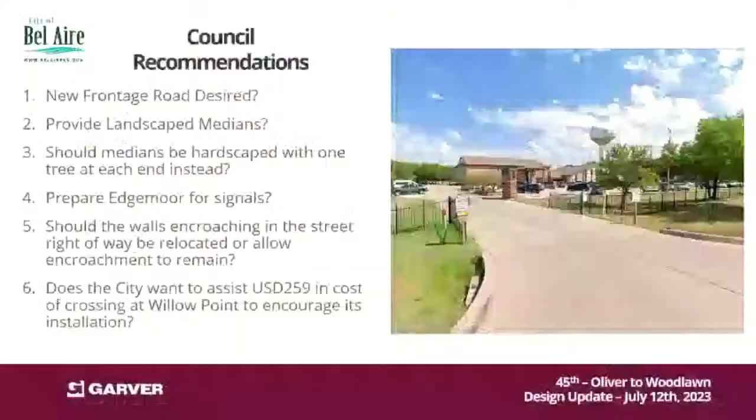And then also preparing Edgemoor—do you like the idea of going ahead and having that prepped so that if the signal warrants are met, it'll be easy to upgrade that intersection? The feedback I got is that we need more clarity on making sure we're creating a safe crossing environment for the students. That's probably the biggest feedback there.

One thing we talked about on Woodlawn with the medians was the impact on emergency vehicles, because if you don't have a median, you get extra space on the road. Well, the fire department actually said absolutely not, you couldn't put them in there—there wasn't enough room to get around traffic if it's a median. So I think that's something to think about.

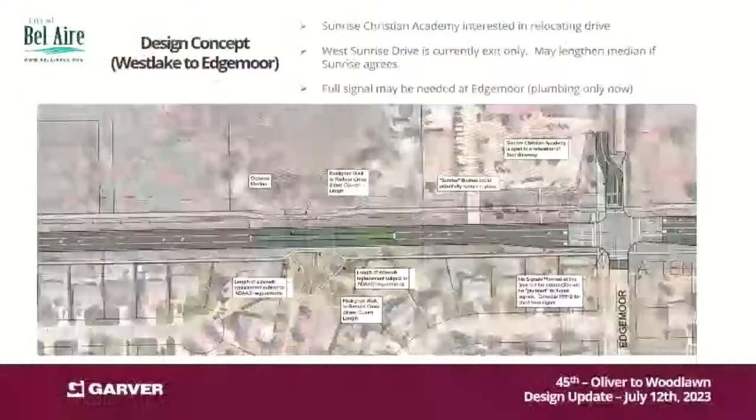Well, if you have that same situation here on Oliver, you're probably not going to be able to do medians there either, but I don't know that. Here you've got this extra lane, so hypothetically you could put a very short median without any encroachment. But as you go to that longer stretch, the question becomes—and cost is already a driving factor—would you want to widen the road to allow the median? My guess is going to be no on that.

But as far as the medians, would you say you're leaning away from those, or do you still want us to give you some feedback and maybe talk to the fire department as well? I'd get the feedback from the fire department first, because if they're saying absolutely not, then there's no sense in us even having a discussion about it.

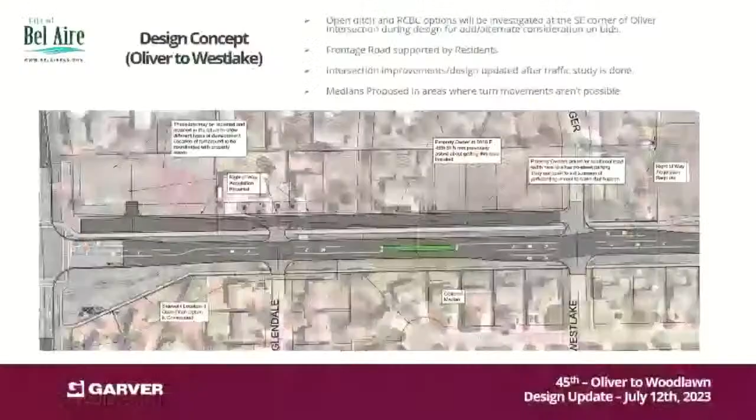Ken, does it feel like, just looking at the roadway, where there's turn lanes and extra lanes would be an appropriate place to put some shorter medians, just to break it up, not have those bigger long ones, but having a few approaching intersections? Or is that not even possible? My guess is this one here is going to be the only good opportunity. The rest of them, it won't work. So we'll have that conversation with the fire department.

The Edgemoor signals, it sounds like the biggest concern there is just making sure that whatever crossing we're doing, we're making sure it's a good long-term solution. Your only cost to do that is to lay some conduit, right? In the signal boxes, but it's not significant. It's relatively inexpensive, and it's far cheaper than trying to bore them under at a later point.

What kind of signal box would we have to put in? Is it a concrete bunker type thing or what? No, they're just basically little mini manholes. Would you put in the footings for the poles and leave them there with bolts, or would you wait to do that? No, you really don't want to do that. You don't want those bolts sticking up.

Could be on a concrete pedestal. When you've roughed them in the past, have you done that or not? Typically, we don't. We just go ahead and prep the boxes because that's the underground, that's more difficult to do at a later date. We typically don't put the pole bases in.

And then those walls that I talked about as well as Jim's idea of maybe looking at shifting the roadway south a little bit, if that allows us to do that. We can talk about that a little bit as far as if that's the better solution there.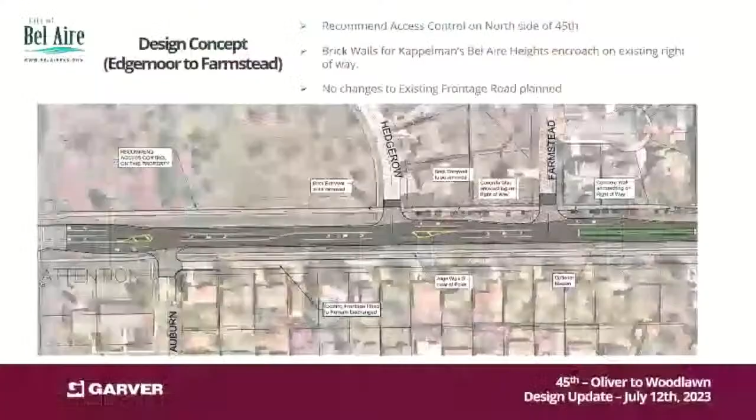Yeah, and there's enough room we can transition that to where, and then to Mr. Dean's point earlier, we can really get the road curving around, get the curves out of the road.

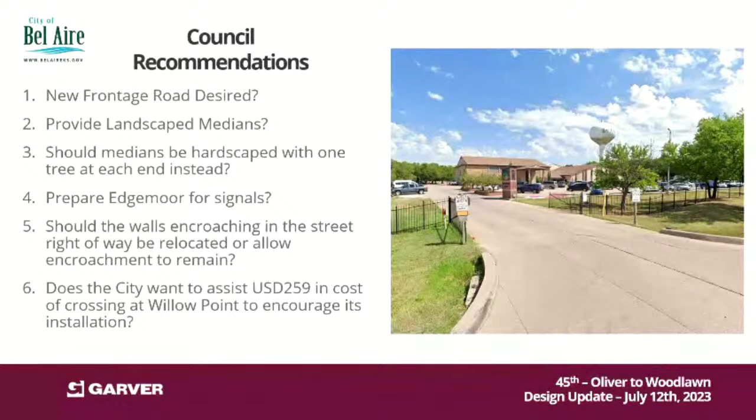And then the last thing, considering that crossing there, is that something the city wants to promote or not? The school district brought it up originally when we talked about 45th, with the notion that they save $60,000 a year for every bus they don't have to run. So if they've got even one bus in 2 years, they've paid for their road crossing. It's just a matter of them determining it. I just wanted to bring that up since it was part of the previous discussion, as something to be aware of.

Will you remind me, you mentioned before some reconfiguration that's going to go on at Stuckey where crossing through that neighborhood is going to make sense for kids. Did you say that Stuckey's going to be doing some construction?

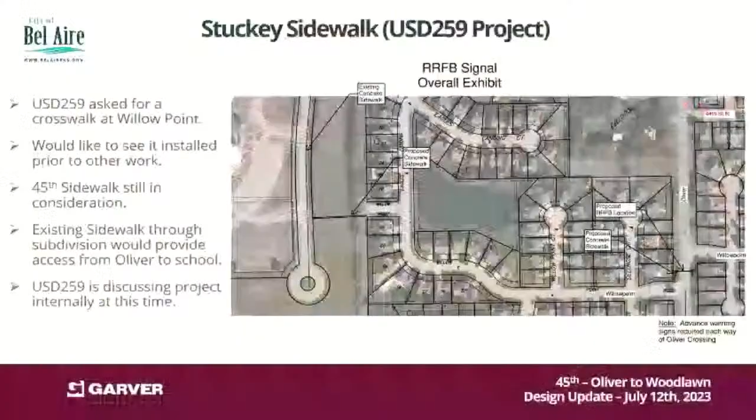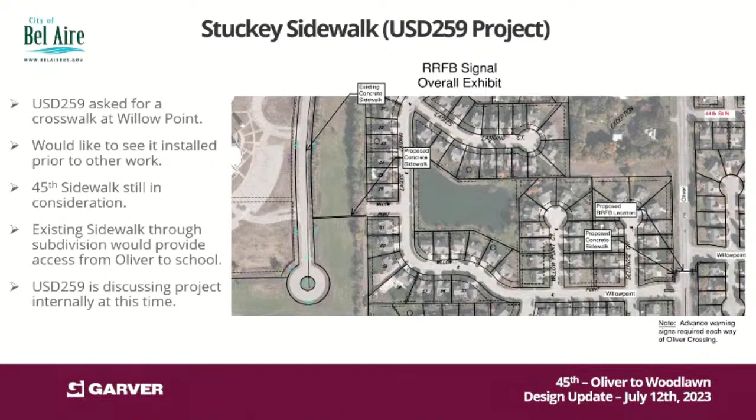Yeah, so part of that would be when you're looking at it, they'll have to do a sidewalk across there, is what I was talking about. Does that impact future development on that property? But that would be the part I was talking about before, constructing that walk. That's part of the $90-some thousand that I told them they would have to budget for the project.

I guess my general feeling on that is we improved Woodlawn, and they didn't help us pay for the sidewalk there. We put in the Isley sidewalk, and it didn't cost share there. This is going to save them money busing, so I think they should cover the cost. That's just my opinion on it.

But also the other one on 53rd that we brought up earlier, where it crosses 53rd to Isley, that could warrant potentially a signal too. So a crossing signal that would benefit them, I assume, because of busing.

Yeah, potentially, if they've got any kids in those neighborhoods over there. Well, maybe they don't yet, but would. I'm sure they will, wouldn't be too surprising. They're all duplexes in there, right? Yeah, so it wouldn't be surprising.

So we've put in quite a few enhancements already to our community, and it's great, but that is already benefiting them and they haven't cost shared on it. So I kind of feel like this is an opportunity for them to step up to the plate and pay for that one if it's going to benefit them that much, or at least tell us what they're thinking.

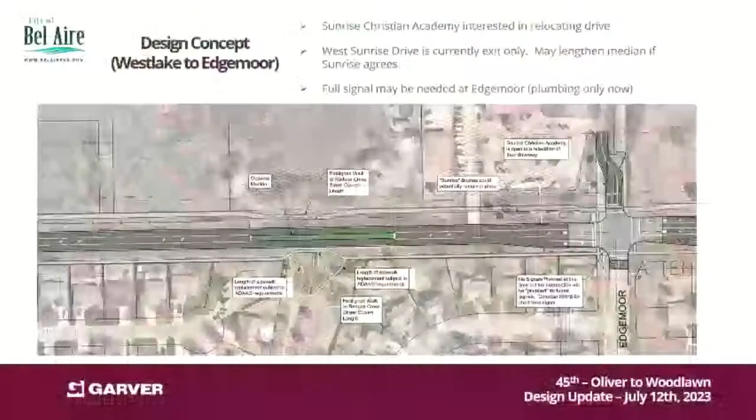One thing I did want to mention that's kind of funny. I don't know if the grades will work out, but at Sunrise they planted bushes that spell out Sunrise. It actually falls in between our sidewalk and the road. So I don't know how you feel about letting them leave that there, but the grading may still end up dictating it needs to be removed. I did find it kind of funny that it fell in where potentially it could stay.

Is that another one of those insurance issues? I don't know if running into bushes is going to hurt too bad. But did they feel strongly about keeping the Sunrise bushes? They were fine, they knew when they put them out there that they were putting them in harm's way. So I'm okay with them keeping them if they have an agreement to maintain them.

Interesting. Okay, well, back to, I don't want our staff taking care of stuff like that we don't need to.

Well, I will say back in the day there was an LED sign they had to put in, and they were not allowed to put it where they wanted to. We're at a point now where it's nice that sign isn't a conflict. So that decision, when it was made, was the right decision to say, sorry, I know it's way off the road, but that's only for now. Whoever had the foresight, I remember the discussion but don't remember who was the leader on making them put it back there off the street right away, but it was the right choice.

My other thought is, as you talk to Sunrise about the intersection improvement, essentially a new street into their property, find out their preference on whether it's a full warranted light or a signalized crossing. If there's discussion on cost share, and if they're leaning toward preferring a full light, that's more expense, but maybe we can share that burden. Yeah, it's certainly a conversation worth having.

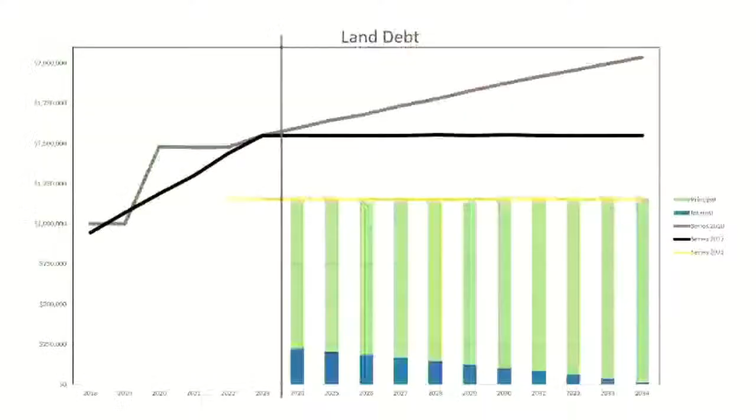So here's our total debt with the land debt, and you see in 2034, that's when it comes off.

Say we did temporary note financing, you pretty much have a 3-year window where it's in temporary status, and then you permanently bond it. We can bond it straight out, but I'm just trying to tell you what we've traditionally done. That gives us, we start construction now. A temporary note is pretty low interest rate. During construction we estimate numbers, and once we get the final construction costs, we go out to bond it. We can bond anytime in that 3-year stretch.

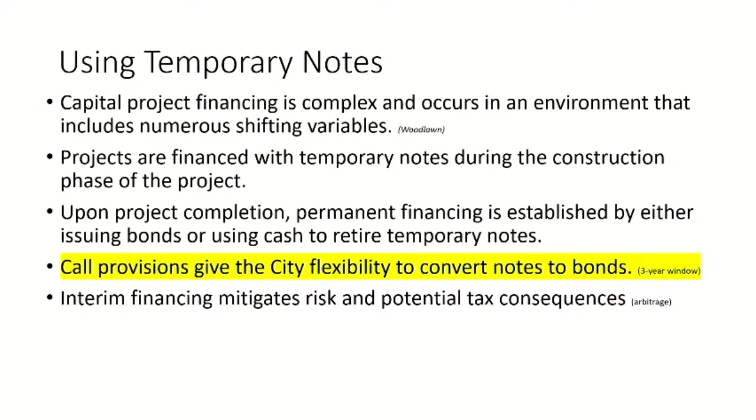Just a footnote, the real big thing is what happens if we start construction at 2.5 million for 53rd Street this year, maybe 45th. These are estimates we were given, it might be a little more than 2.5 million, our share, if it's a one WAMPO project. And then Rock Road, who knows, throw 5 million at that, might be a KDOT/WAMPO project.

So I wanted to throw some debt service numbers at you guys. What would happen to our debt? Total debt service if we did all 3 of these projects, 2023, 24, 25.

This isn't quite as scary because we've sold all the land, and we have some reserves there to help us out through 2034. That's kind of where we would deploy those reserves to pick up the debt service payment above the line we're currently paying at.

So what you're essentially doing is using the reserves to pay down debt service on our land debt. That drops our entire debt structure down to where it is today. So you're using your reserves to pay for the debt service up until 2034.

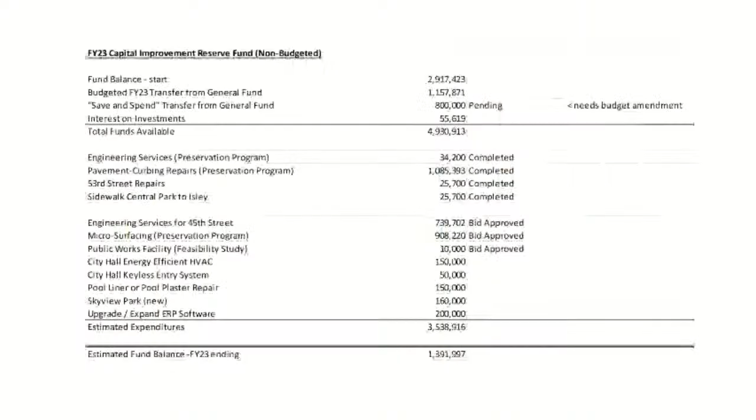We budgeted $150,000 for that, it might be $200,000, we just don't know. We're really going through those phases right now. So that's why the approach of deploying some of our reserves to pay for some of these bigger ticket items would be more beneficial than trying to throw all our remaining capital improvement reserve of $1 million in cash on this project.

In 2024, just looking at the projects coming up, Central Park Pool, we still don't know what we're going to do. Skyview, the developer is really interested in building a nice park over there. We said $160,000, and that covers pretty much playground.

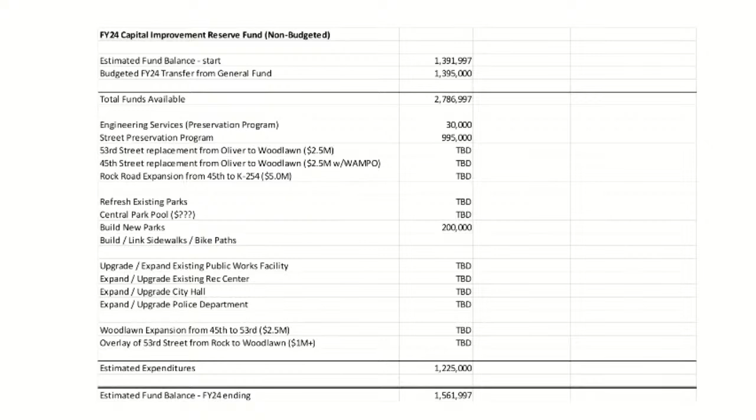As we get into it, who knows what else is going to come up if we want to connect some sidewalks or do whatever we need to. So I think if we're being honest with ourselves, we're going to need every bit of our capital improvement reserve in the next 2 to 3 years to address a lot of these needs, whether it's facilities, parks, or the rec center, which had a really good turnout on their proposed plan. So I'm just trying to look ahead 5 years and what we're going to need. That would be my solution to this problem. Now, you guys have the power of the purse, but that would be my presentation tonight on what we would do.

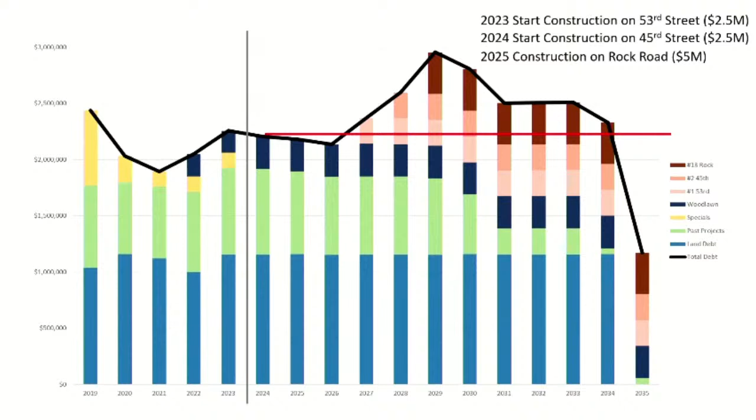So if we spend like this chart that you just brought back up, will we have any of the $5 million left at the end of that? Of course, yeah. So I can do the numbers, but right now we started at 5 million, and we're at 5.8 with interest rates as they are.

$2.5 million on a 20-year bond. Let me do a quick calculation here. About $187,000 a year in debt service. That's what it would cost us—$187,000 in debt service for 53rd Street, and then 45th. So times that by 2, those two projects would be $375,000 a year, times how many years left.

And we don't even know if 45th is going to be built in 2024, so really that's a short time frame before we get to 2034. But if we keep that money invested at 5%, the interest will pay those payments, right? We don't even have to dip into the principal. Well, I mean, your principal—right now, in 2 years, our principal will be secure, but we're talking the next 10 years.

So yeah, eventually you're going to dip into the principal of what we have, but that's what I missed too, Ted—you threw out 3.8%. That's our financing rate expected. Yep. And the reason you give up a 5% return is because that's short term, and 3.8 is a 20-year rate. So you're reducing risk by locking in that 3.8 for 20 years versus 5.